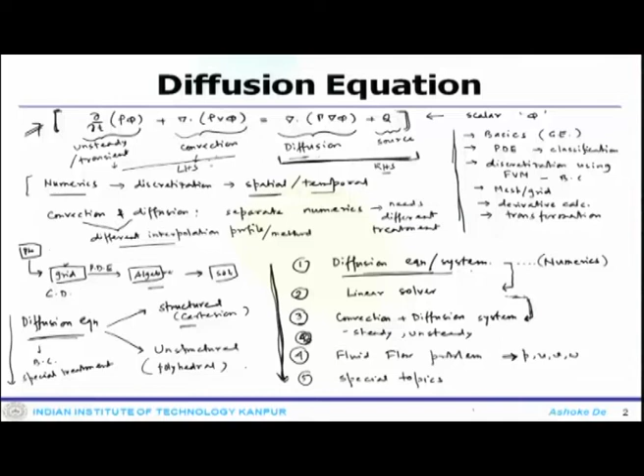So, we will start with a structured diffusion system or Cartesian system and then move to the unstructured. Let us have a 2D system, a 2D structured Cartesian mesh, Cartesian grid. It shows some generic system, and we start with the steady state diffusion equation. So, our governing equation will be minus del dot gamma del phi equals q. That is our equation which will govern the system.

So, we have made it simpler: drop the unsteady term and look at the steady diffusion system with source term. So, q could be a source or sink. Now, we have put these things in a rectangular Cartesian grid. In a rectangular Cartesian grid, this is how you can define your reference frame. This direction is x, this direction is y, and the element of interest is some interior cell which is marked as C. So, essentially we are interested in this particular cell,

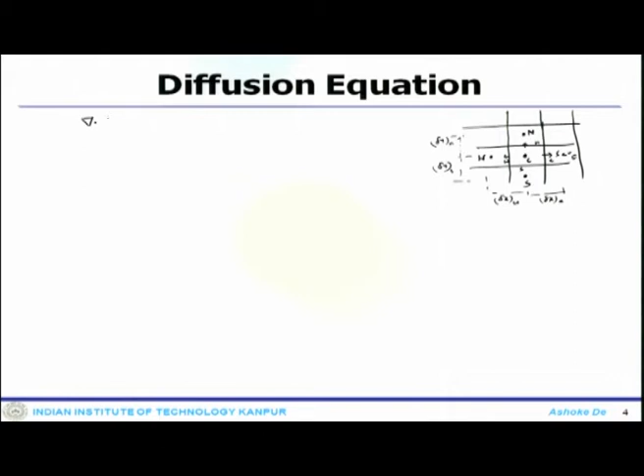So, our equation is del dot J phi equals Q, where the diffusion flux is defined as minus gamma del phi. As we have done, you do the volume integration and then convert to a surface integral to get back an algebraic equation. So, that we have already done.

If you follow the same procedure, doing the integration, this will turn out to be the summation over all the faces f of minus gamma del phi at f dot Sf equals Qc Vc, where Vc is the volume of element C and Qc is the source or sink for element C. So, you get this algebraic system.

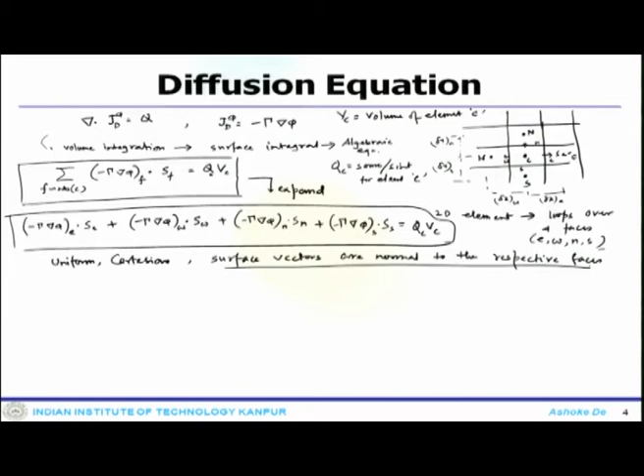So, the surface vectors are normal to the respective faces. Okay. This is very very important. If that does not happen, we have already seen we cannot, if they are not collinear or there are some sort of off-the-center connections, then we cannot straight away calculate the surface vectors.

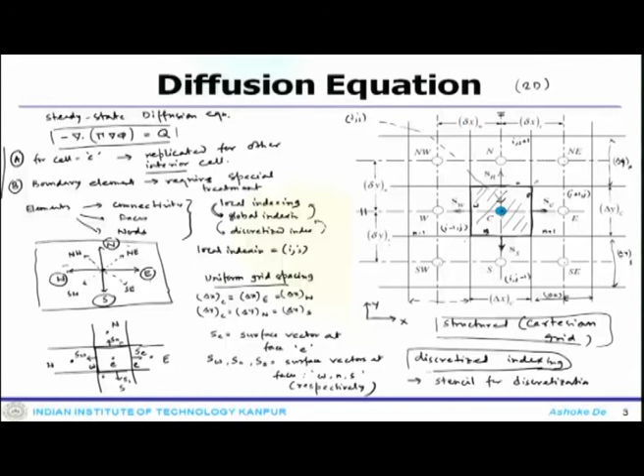So, having said that, we can estimate Se. Se would be nothing but the surface vector, which is delta y positive east dot i. So, this should be essentially magnitude of Se i. So, one can write Se i. So, the normal vector here is SE, which would be this distance into the unit depth. So, that is what it does.

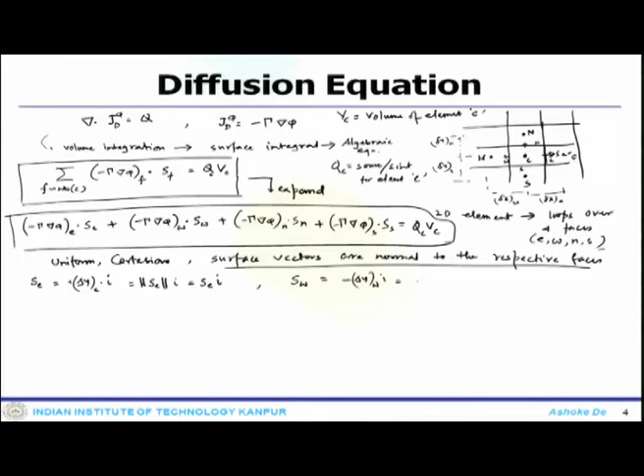Similarly, you write for SW, which is minus delta y W i. So, this should be minus SW i. And why does this minus sign come here? Because if you assume this is the local coordinate system, this goes in positive i and this goes in positive j. So, this is my positive direction, this becomes negative direction. Okay.

S n would be delta x positive n dot j, which is essentially S n j, and similarly S s would be minus delta x S j, which is minus S s j. So, here you get all your surface vector definitions. Once you get that surface vector definition, you can calculate all these individual surface fluxes, the diffusion fluxes. First, let us look at the east face.

So, if you look at the east face, that is essentially your J E dot S. So, this should be minus gamma del phi E dot S E. So, this is the term essentially. Now, if you expand this term, this would be gamma E S E.

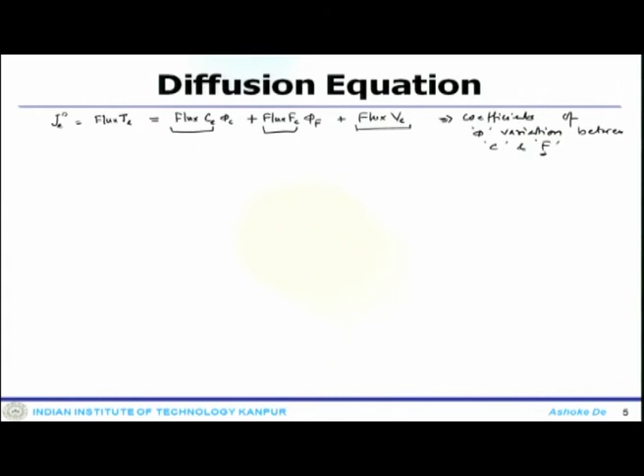Now, if you assume the phi variation is linear, then you can have the system like this: C, east face, this is the distance delta x e, and this is the variation, and the linear variation will do the job. So, this would be phi c and this would be phi e, and the slope is del phi by del x. So, the profile would be the interpolation slope of these two.

So, I can write del phi by del x e with the linear variation as phi e minus phi c divided by del x e. Now, if you replace this expression in this particular equation, combining these two, what you get is that total flux is minus gamma e delta y e, which is gamma e Se del phi by del x. So, gamma e delta y e phi e minus phi c divided by del x e.

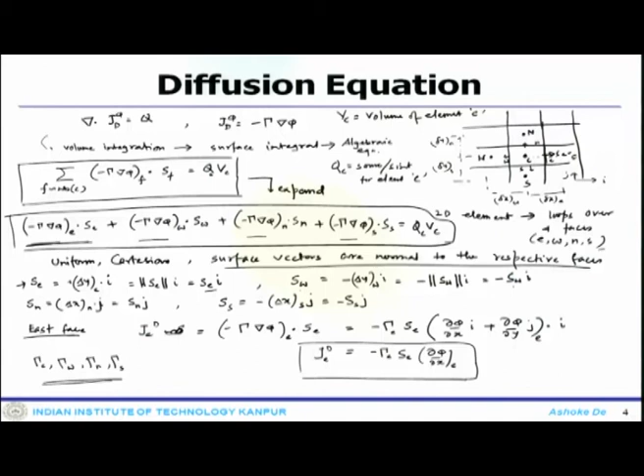Now, when you move to the west face, we can similarly find that the total flux at the west face is minus gamma del phi_W dot S_W, which will turn out to be minus gamma_W S_W (del phi by del x i + del phi by del y j) dot minus i. This is as per our definition of S_W. Okay. So S_W is minus i.

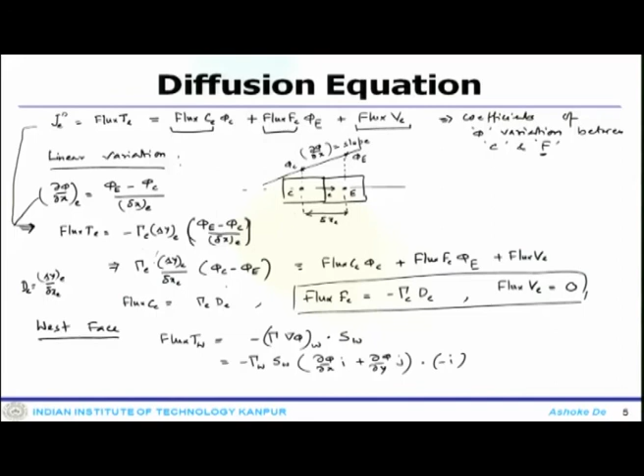So if you do this, this would be gamma_W S_W del phi by del x at W, which can be written as: the total flux T_W equals gamma_W S_W del phi by del x at W, which is nothing but gamma_W S_W (phi_C minus phi_W) divided by del x_W,

and the coefficients would be flux C_W phi_C plus flux F_W phi_W plus flux V_W. If you match the coefficients from these two equations, then you get flux C_W equals gamma_W d_W, flux F_W equals minus gamma_W d_W, and flux V_W equals 0. So these are the coefficients that you get,

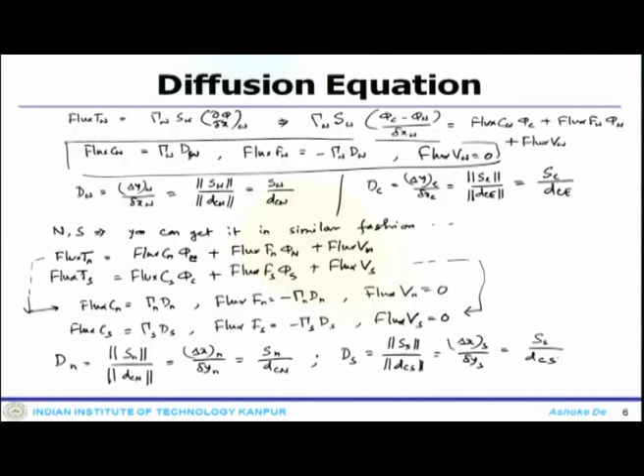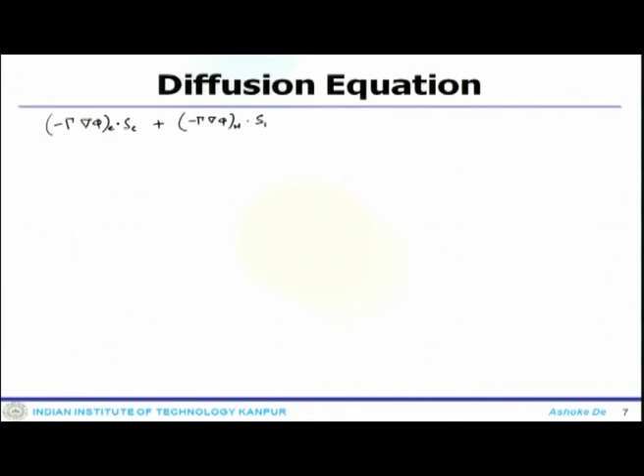So you got all these coefficients, and now put them together in the final equation that you had: minus gamma del phi_e dot S_e plus minus gamma del phi_w dot S_w plus minus gamma del phi_n dot S_n plus minus gamma del phi_s dot S_s equals Q_C V_C. So if you put everything we have obtained together in this equation, what do you get?

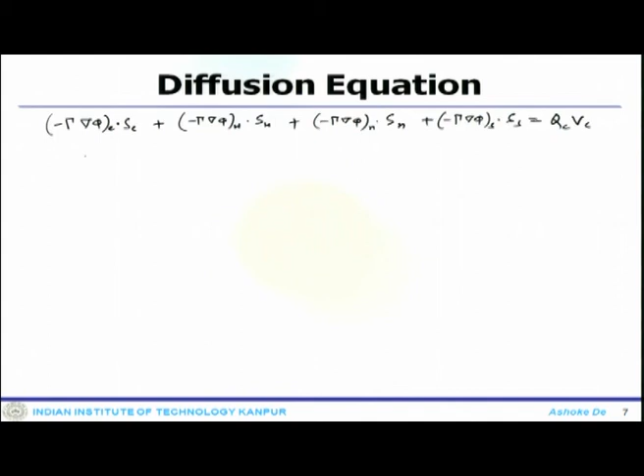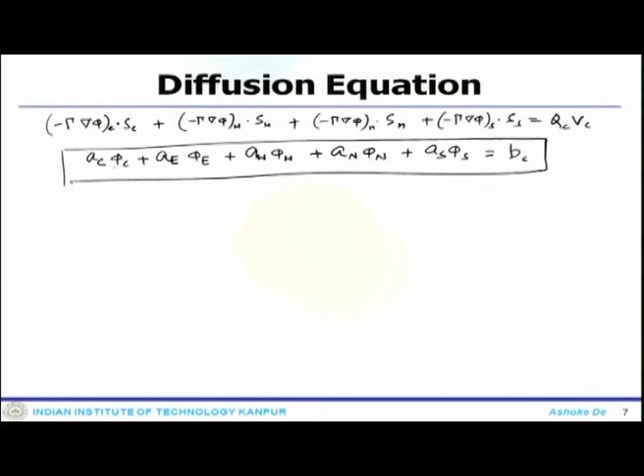You get the equation a_C phi_C plus a_E phi_E plus a_W phi_W plus a_N phi_N plus a_S phi_S equals b_C. So this is the algebraic equation, or linear equation, that you get, and we will see how to calculate the coefficients in the follow-up lecture.